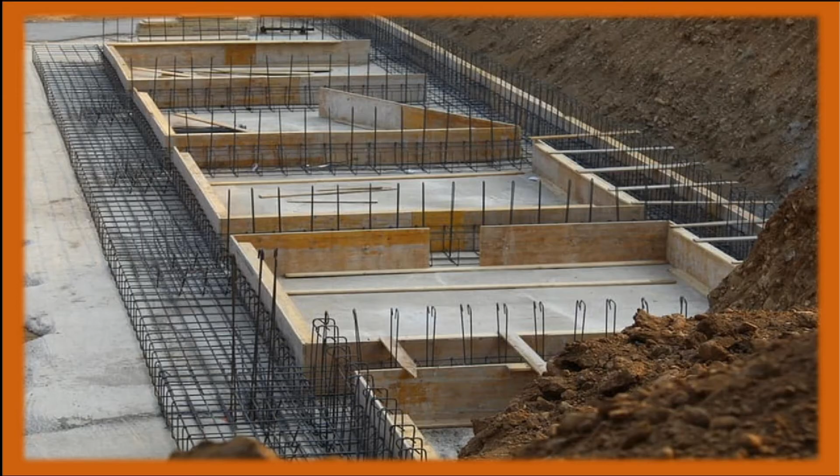Good day everyone, I'm Zachary May R. Hinarilias, and today our group will be discussing the bearing capacity of shallow foundation.

First, what is foundation? Foundation is the lowest load bearing part of a building, typically below ground level.

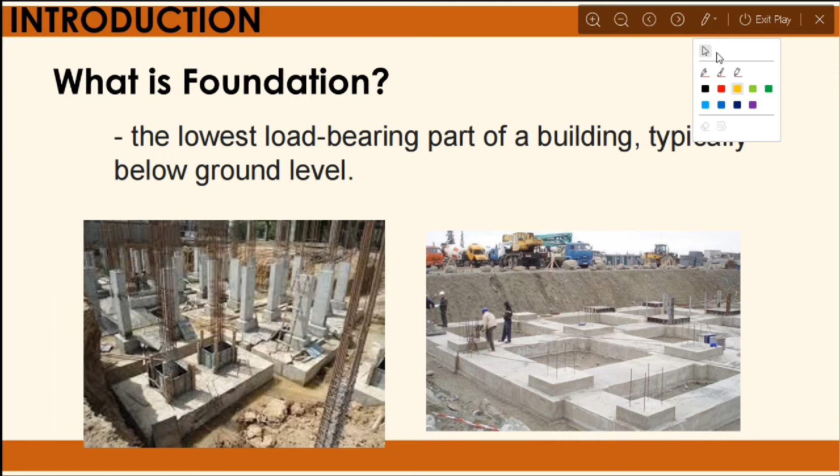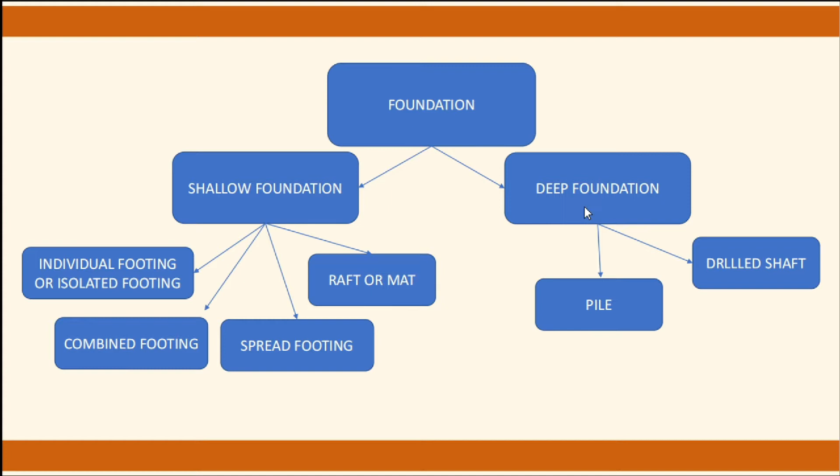Distribute loads from the building into the upper layers of the ground. So the depth from the ground surface of the underside of the foundation is less than 5 times the width of the foundation.

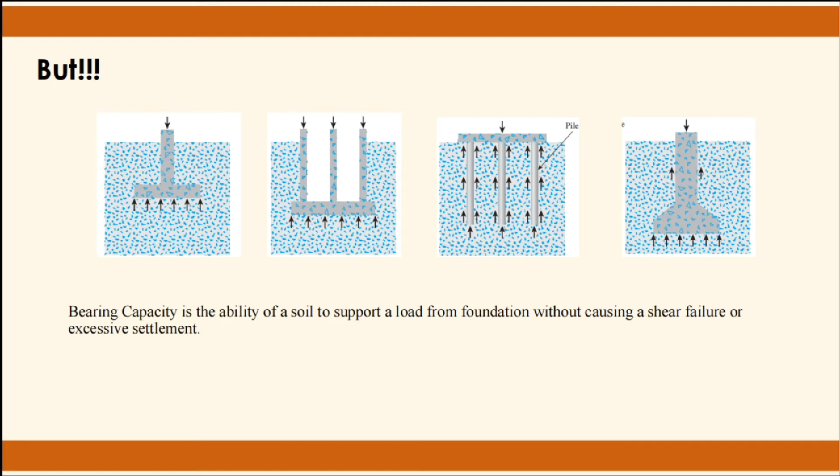of the soil. So bearing capacity of soil is the ability of soil to support a load from foundation without causing a shear failure or excessive settlement. To know more about bearing capacity, my groupmate will discuss it.

Good day everyone, I'm Donna Faye Ulog and I will continue the report about the bearing capacity for shallow foundation. So under that is the ultimate soil bearing capacity for shallow foundation. To understand that concept, we need to know first the modes of shear failure in soil.

So we have to understand it first because in this shear failure, this is where the formulas were derived. So the formulas come from these shear failures. So we have three shear failures: the general shear failure, the local shear failure, and the punching shear failure.

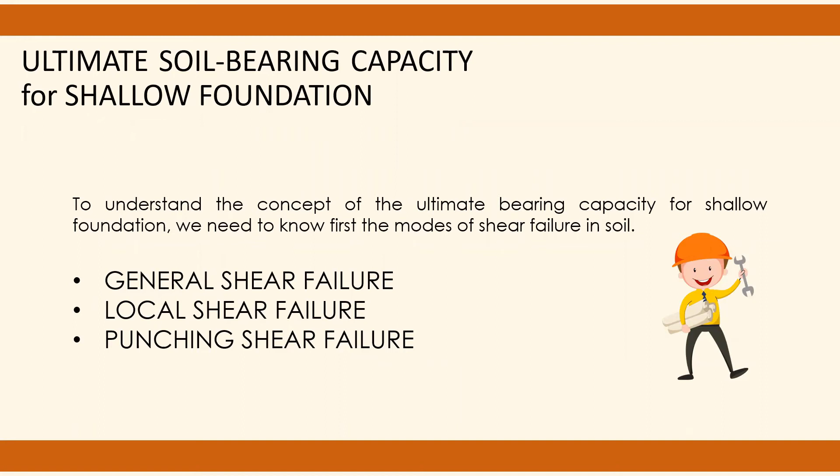In the general shear failure, it usually occurs in dense soil. Complete shear failure develops from a corner of the foundation and extends to the ground surface. As the foundation overturns to one side, the soil on the other side is pushed up to the ground surface. This failure is the most catastrophic to the structure.

So, sabi dito, yung foundation is naka-overturn. So, in every superstructure, there is an overturning moment, maybe because of earthquake loads, wind loads, and other different loads. Sabi dito, it overturns from one side and creates a ground surface bulge. So, it creates this. So, parang ganyan.

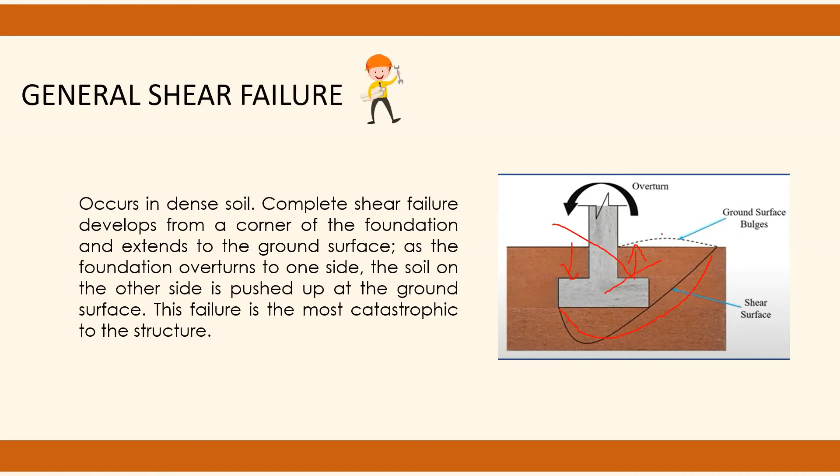The superstructure creates a ground surface bulge. Padulas. Like, it will look like this and will create a bulge here. So, yan yung general shear failure.

And the next is the local shear failure. It occurs in medium dense soil. The shear failure develops from a corner of the foundation and extends locally to the adjacent area beneath or beside the foundation. The failure does not extend to the ground surface. As the foundation overturns to one side, a small bulge on the ground surface is visible on the opposite side. It is not a sudden failure. Instead, the foundation will gradually settle into the subsoil.

So, unlike the general shear failure, the local shear failure gradually lang na nagsisettle and then tilts. So, it will still tilt on the other side, but slowly. Like, hindi siya mamalayan. And hindi siya super na magkawas. It will just look like this, but it will still create a small bulge. So, the difference is it settles gradually.

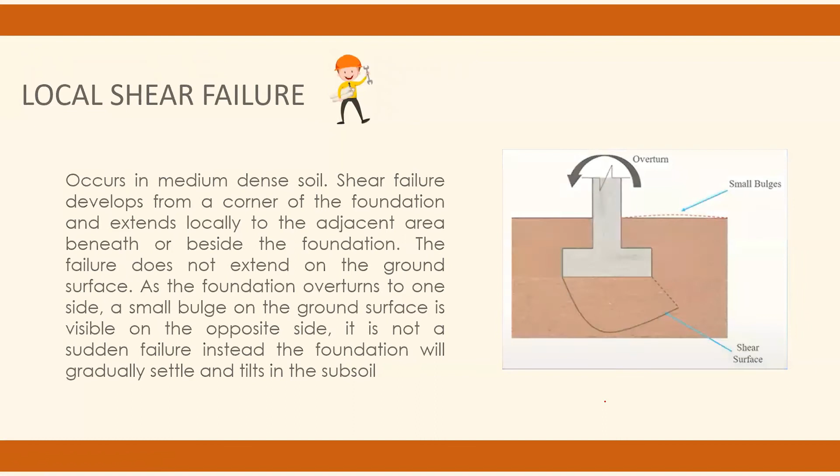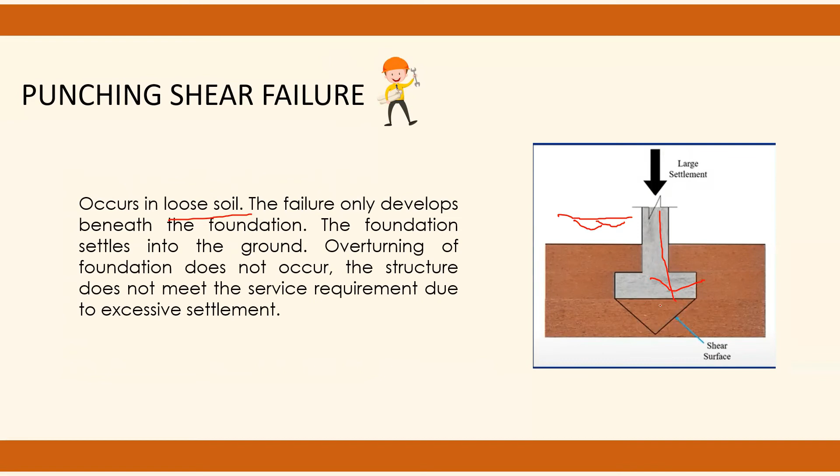So most commonly, this happens in road structures. If the ground is not compacted enough, the road will create mga bangag-bangag. So if we have a required compaction, we have to settle it so that there will be no punching shear failure. So both of these failures happen on different sides. It can happen on the left side or on the right side.

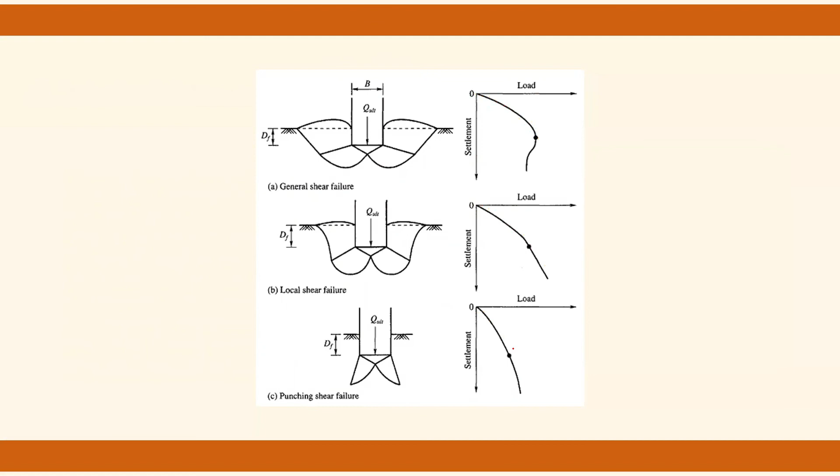So here is the graph of the load versus the settlement. So here there is a sudden change in the settlement. Dito naman gradually lang. And then dito, unti-unti lang, but it will not create an overturning moment.